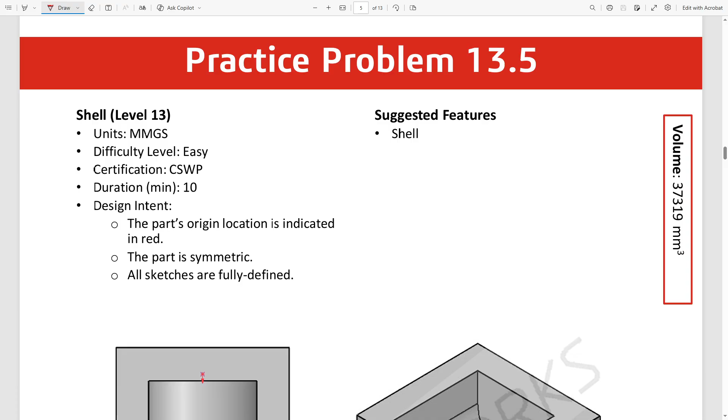I'm going to walk you through how I solved the CSWP practice problem 13.5. And for this problem, I'm going to do two shells, a 15mm shell and then a 3mm shell. This one is fast, so I'm just going to speed through the problem and then explain the dimensions later. All right, let's jump into it with the front plane.

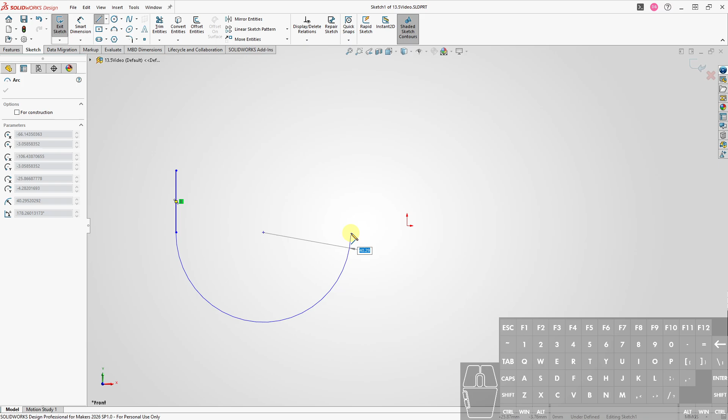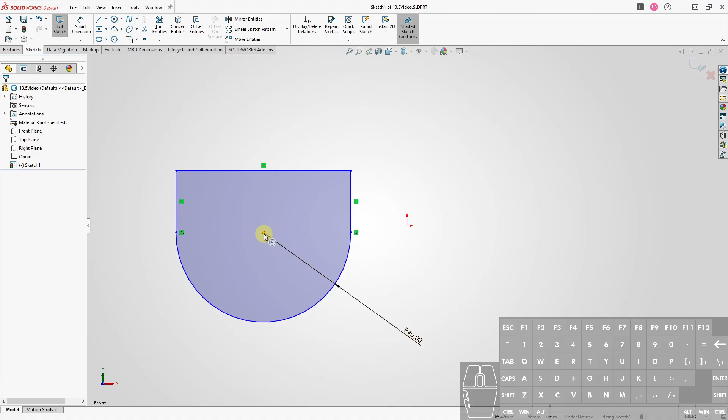So first I'm going to create the basic outer shape. And the dimensions will be a little bit funny, but you'll see why we're doing that in a second. So for the outer radius, I'm going to take the radius that was given, 28, add the 15, and subtract the 3. And we'll explain in just a little bit why. Let's make this centered at the origin, and then we'll set this vertical distance to 18.

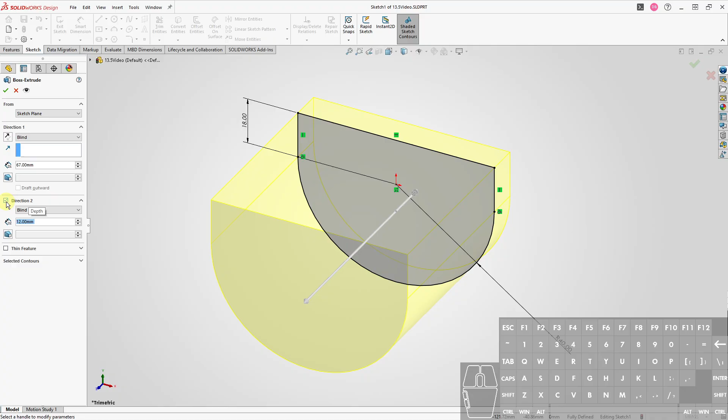So then we can extrude 67 in this direction, and then in the other direction, 15 minus 3. Okay, that's going to be the lip on the other side. Okay, and then we'll jump into shell. We're going to shell 15, the top and the front. So that way we get this part of it. We get the kind of space on the inside.

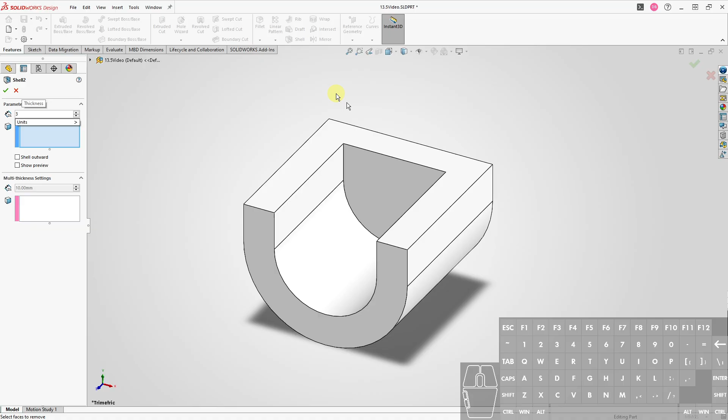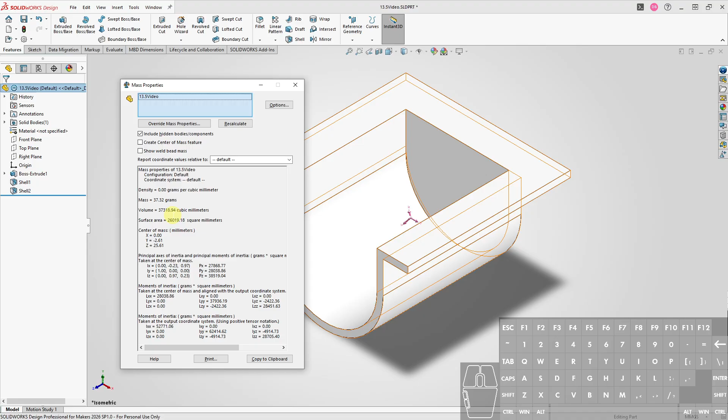And then we're going to do another shell of 3 all around the outside here. Okay, and also the back. Oops, almost didn't get that. All right, and we're done. Check the mass, or the volume. 37318.94, but that's going to round to 9. And that's exactly the volume in the answer key.

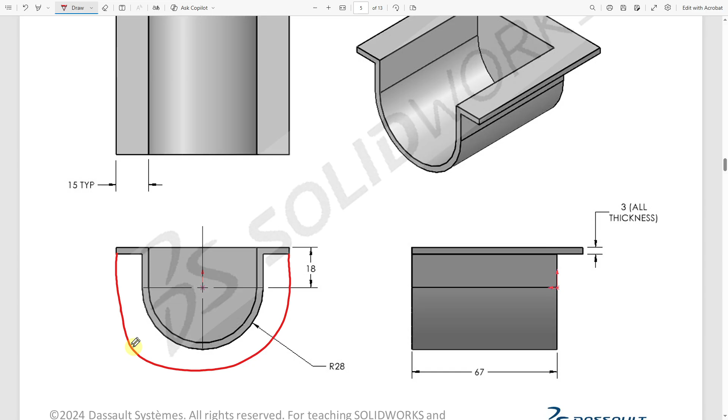So to explain some of the dimensions, basically for the main shape, what I did is drew this kind of shape. So I needed to create this arc right here. Didn't draw a very good arc, and that arc was going to have a radius of 28, which is this arc, but then plus the 15 for this part, like right here to here is 15. If I do plus 15, it's going to shoot me out a little bit too far, so I have to back up the thickness of the thin shell, which is 3. So that's this 3 right here.

So that's why I did 28 plus 15 and then minus 3. Or you can think 28 minus 3, which gets you to here, and then plus 15 to get out to the end of the arc.

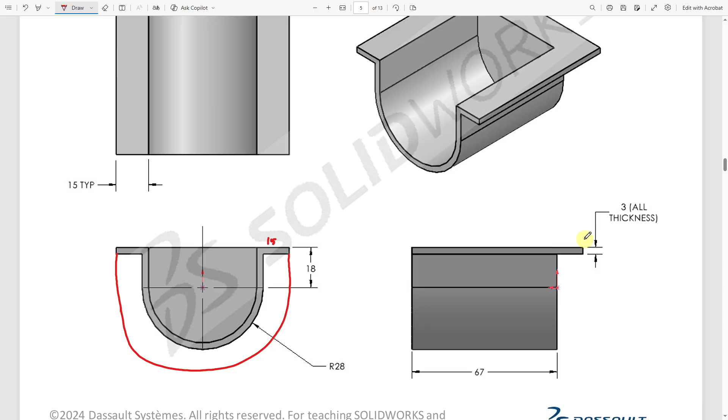All right, and then in terms of the little overhang right here, basically if I look from here to here, this is 15, but there's a little shell thickness of 3, so I have to subtract that. So if I look right here, it's going to be the 15, but then minus this 3 right here. So that's why I extruded 15 minus 3 in that direction.

So hopefully that explains a little bit about why I set the dimensions the way I did. And if you do two shells, it ends up being a very, very quick problem. So it's kind of a cool little problem.